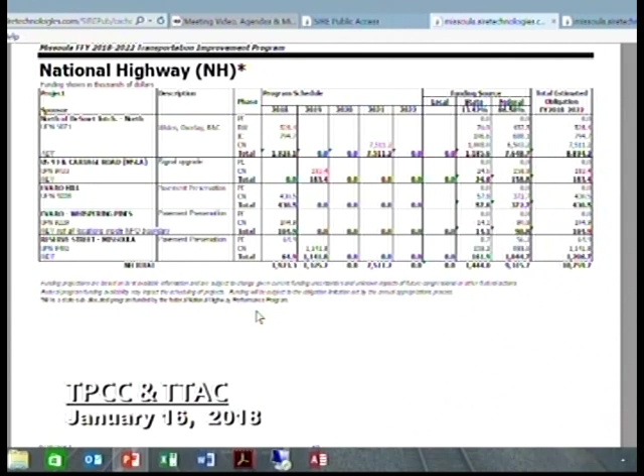So this next one here is the new funding source. If I can find it. Did I skip that there? Did it come up on there?

Here we go. Yep, so the project from Interstate Maintenance, the Van Buren Street Interchange, was just moved to this new funding category. All of our dollars are the same there.

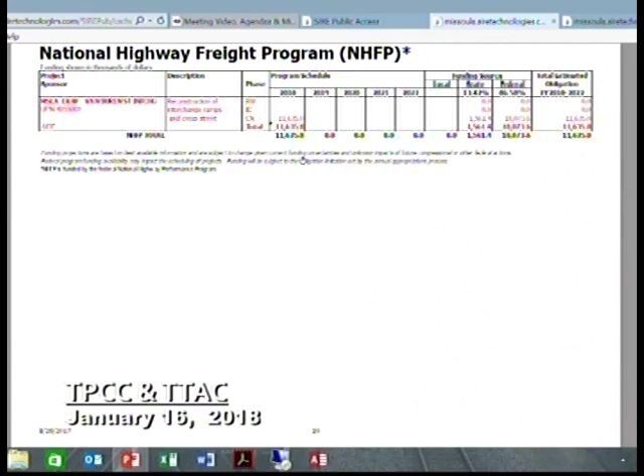I don't know if there's any questions right off the bat with that. I'll just add that the National Highway Freight Program category is a new category that was created under the FAST Act. It's not new money, it's just a new category that essentially says states have to have this category and have to program projects in it. So again, it's not new dollars, but the state has to show that projects are being completed that help the National Highway Freight Program. So hence moving the Van Buren Interchange project into this new category, it doesn't change any of the dollar amounts, just puts it in a new funding category.

For HSIP funding, Highway Safety Improvement Program, the skid treatment project, money was moved in 2018 to 2019. Missoula Signal Safety Project, the costs were increased by approximately $30,000 in 2018. And the Lolo East Missoula Safety Improvement Project, money was moved from 2018 to 2019, no changes there in dollar amounts.

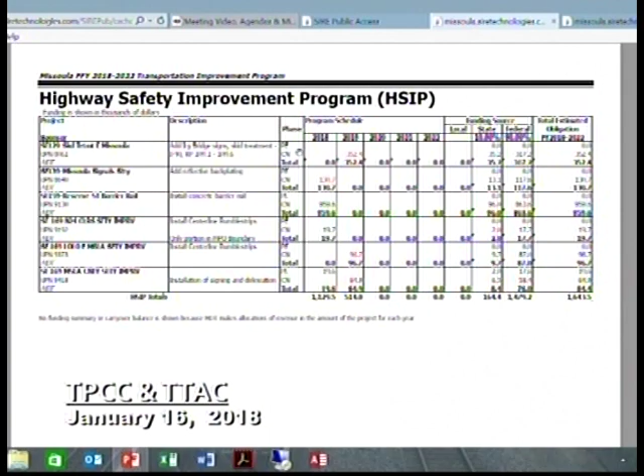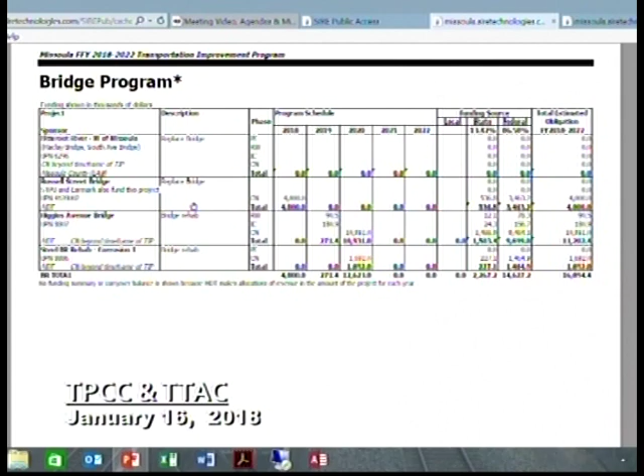Bridge program, Steel Bridge Rehab, they added $1.6 million in construction funds for 2020. And then finally, FTA section 5307, there was a $50,000 FTA transfer from the state in 2018.

And so with that, that's kind of a quick overview. As you probably noticed, most of the funds were just state-managed federal funds or state funds that were adjusted. But our recommendation would be to approve amendment number 2 to the TIP. And with that, do we have any further questions? Any questions or discussion, or I'd entertain a motion as well.

Commissioner? Yeah, and I'm probably sitting next to the person who can answer it, but where's this, what is the steel bridge? Where is that? Where is it physically? Do you want to go ahead and answer that?

I think it's multiple bridges. Yeah, it's one of those projects that spans probably the district, that addresses the steel bridges and deficiencies in some of the steel bridges we have across the district. So I don't know specifically what bridge to point to or which number of bridges that are actually in the MPO. Thank you.

Any further questions or discussion or a motion on the item? I would move that we approve the TIP amendment. Okay, the motion is in order. Is there a second? Okay, it's been moved and seconded. Is there any public comment on the Transportation Improvement Program amendment? Any additional committee comment? Okay, on the motion, all those in favor, please say aye. Aye. And opposed, no? All right, the motion passes.

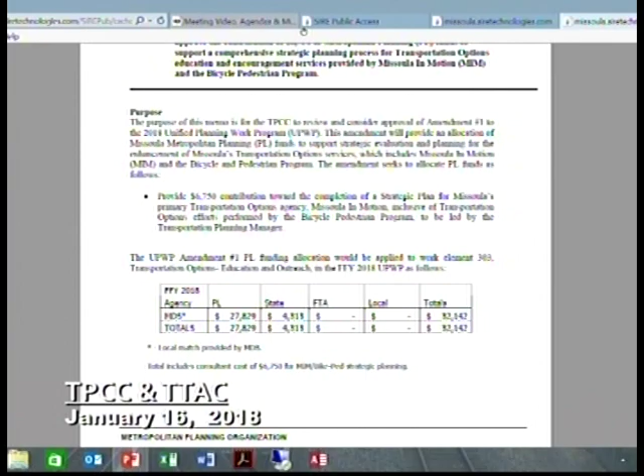The MPO has to go through every 5 or so years what MDT calls a certification process, where they check that we're complying with federal laws. There are no similar requirements for CMAQ funded programs, but I feel it's a good practice to do every once in a while.

Missoula in Motion did a strategic plan in 2006 with a consultant called Urban Planning Partners, and more recently Nelson Nygaard did a study that looked at all the TDM programs in Missoula, examining what Missoula in Motion was doing, the Bike Ped program, Mountain Line, and the TMA.

They looked at all the different services being provided by those various entities and made recommendations for each. A lot of the things recommended in both strategic planning processes have been implemented in one form or another. Some included structural reorganization, some included recommendations for new programs or changes to existing ones. Collectively we've done our best to chip away at a lot of those things.

Over the last couple of years, Missoula in Motion has had a few staff turnover occurrences, and we're looking for some direction on what our next steps should be in our program and how we can improve our services, programs, and efficiencies.

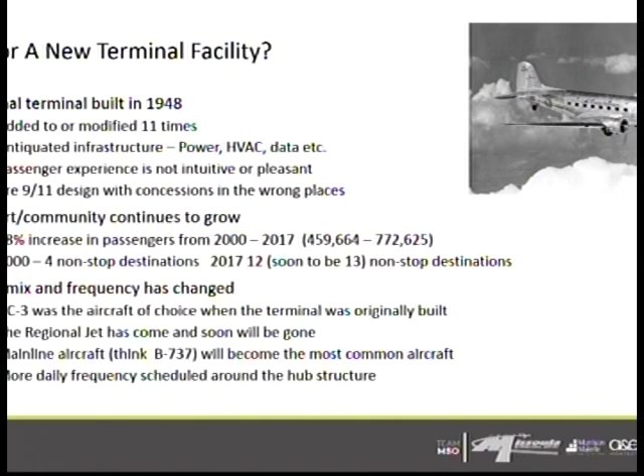So when we went out, we were tasked with some guiding principles. We want to design it for the users. We want you to come in. Right now you walk in the building and you can't even see where the ticket counters are if you come in the middle front entrance. You have no idea where Delta or Alaska is when walking in the doors.

You'll see later on, we want to make sure that it's expandable. We're not going to overbuild to start, but we want to make sure we can add on in little chunks as we grow. And we just want to be a good front door for Missoula.

Kind of take you through why we're doing what we're doing. So we are kind of landlocked. We have a lot of acreage out at the airport, but we have Highway 10 to our north. We have Minuteman Aviation on both sides of us, so we don't want to impinge on their ability to do a great business. And then we have a very good sized aircraft apron, but we don't want to spend money to recreate that. So we're kind of stuck there in that blue line off to the right of the screen - that's the building restriction line, height restriction line.

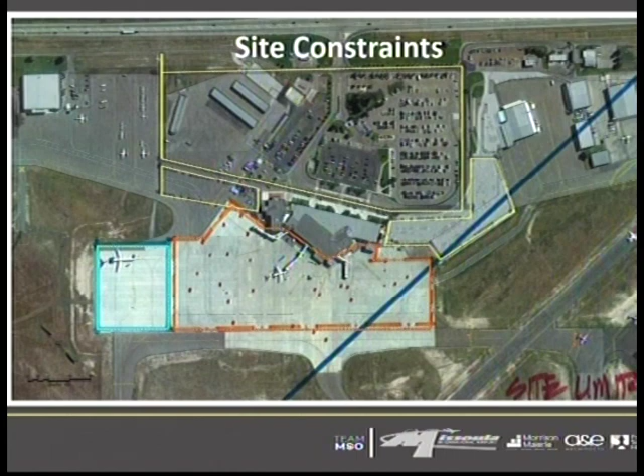So we have that on one side of us, and then we have the aircraft ramp to the south side of us. We're kind of penned in on where we're at, so we need to make decisions for the best use of our land.

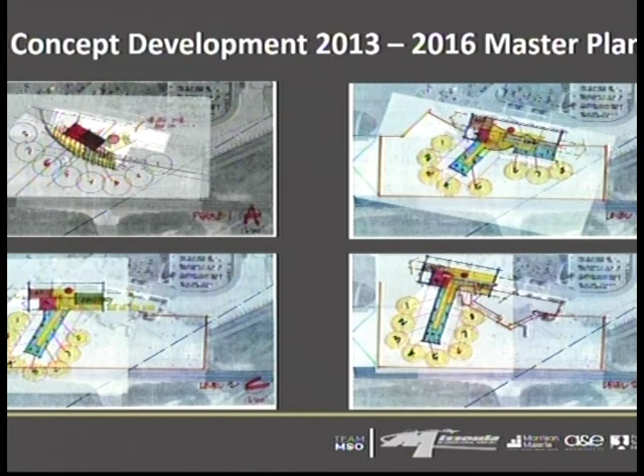So ultimately, based on the usable land without having to redo our ramp area and our de-ice ramp, we came up with kind of a 2-wing design - a double loaded pier to the south and a single loaded pier to the east, where we could just add on as needed. In our lifetimes, we're not going to get to 20 gates, but we have the ability to get there.

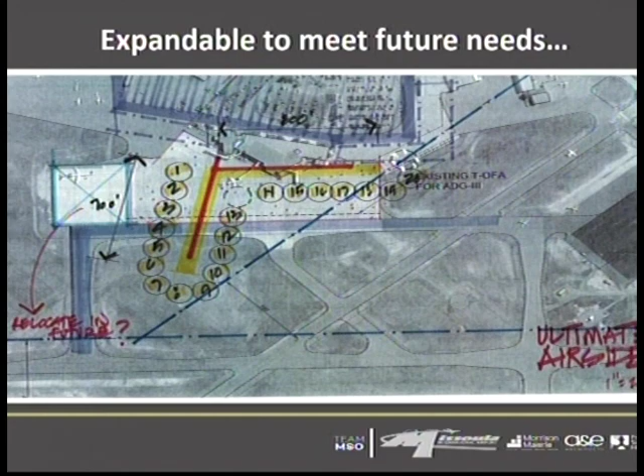So that's where we came up with our preferred alternative, laying it over our current terminal so that we don't impinge on Minuteman, and we need our parking lots to the north there. So that gets us to what we need today, about 8 gates, which is where we're going forward with.

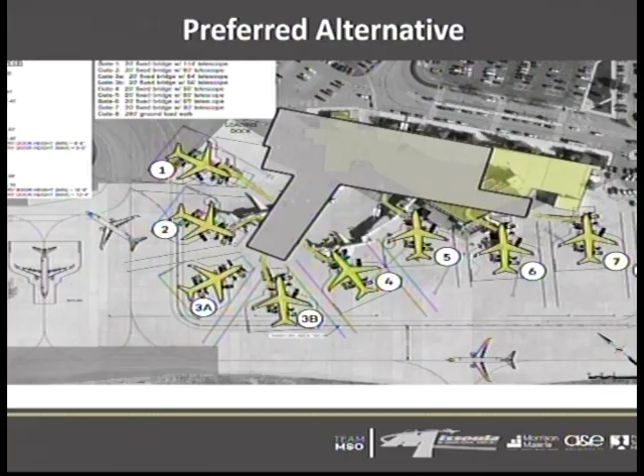So then we went into design, and I'm speeding through this because I want to make sure we have time for questions and answers later. We kind of started with a clean slate of, okay, what do we want?

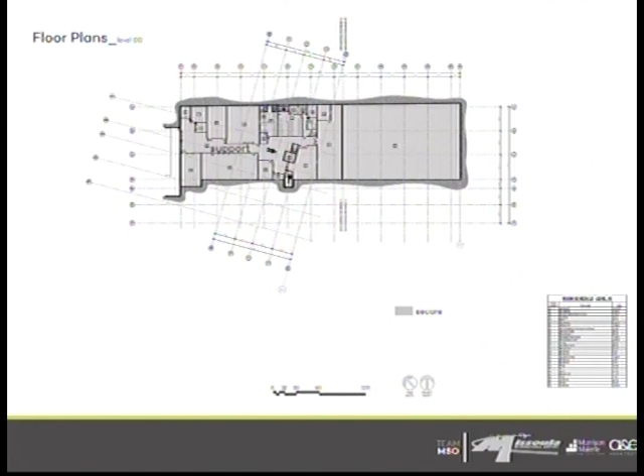The goal of this was we wanted to get our delivery trucks off the curb. So this has a loading dock off to the west end of the building so we're not taking up valuable frontage with deliveries, food deliveries in the terminal, because there are certain times of day where Liquid Planet comes in, and that's valuable frontage curb for our drop-off and pick-up passengers. So this was to get our deliveries sent to the basement where they could get screened, then elevators straight up after everything's been screened to where we need them.

Our first floor, what you would see from the street level, you've seen this in the blueprints there. Ticketing as you drive up on the left side of the building, and baggage claim to the right side of the building as if you were standing in the building.

Right now, when you check your bag at the ticket counter, you have to check your bag, grab it, carry it over, and plop it down on the screening machine. So this would get the bag handling part of it. You would just come to the counter, the ticket agent would tag your bags, put it on the belt, and you wouldn't see that again. So that is to get that out of the public's view. The rest of it is support in the back for ground equipment and airline ticket offices.

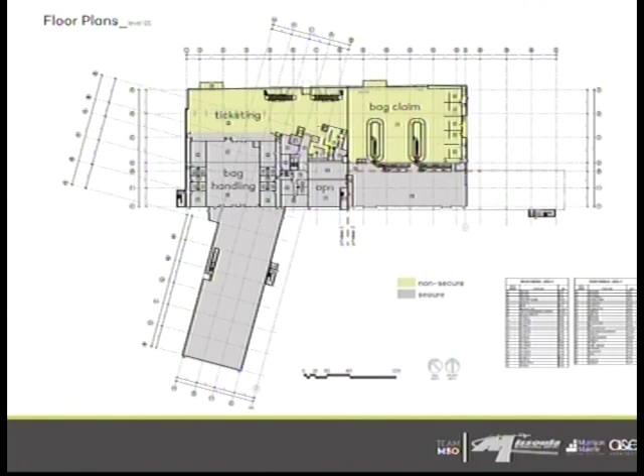Screening would be upstairs versus downstairs today. So you'd take escalators, check in at the counter, and those escalators are at the top that deliver you upstairs, one up from the ticket counter, and then for arriving passengers down to the baggage claim area. Right now we have 2 screening lines. We've been fighting for 3, but this is designed for 4, with the ability to add a 5th down the road, to get through concessions or get through screening.

Concessions would be right there, so past security, restaurant and bar. Nowadays, if I'm a passenger, my goal is to get through screening and relax and make sure I'm at my gate. So this gives our customers a little more selection than we have today.

Our outdoor deck has been pretty popular, so we've incorporated that into the design, where you can order directly from the restaurant bar and take it out onto the deck. The hold rooms are designed for the 737-800s, the biggest aircraft we currently have today, and could handle Airbus 321s, which carry around 221 passengers.

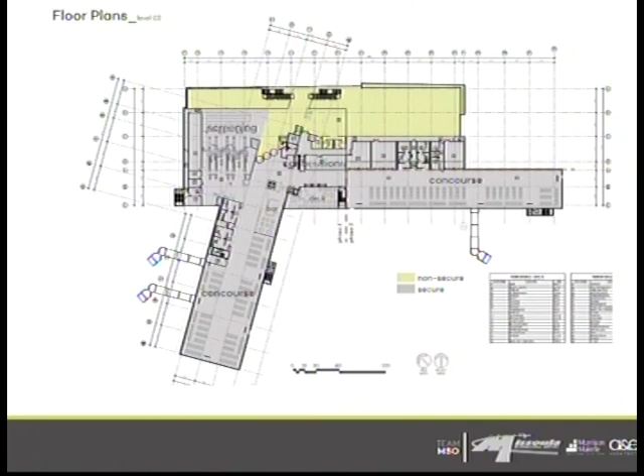One thing we've missed from the good old days is that when you're a passenger or a customer or a person picking up your loved one, there's no place to see airplanes land. So this gives an observation deck where you can actually look out over the airfield. That would be on the 3rd level, along with some administrative support offices up there as well. Our goal is to give customers more of a viewing area, so you can actually see people arrive and depart.

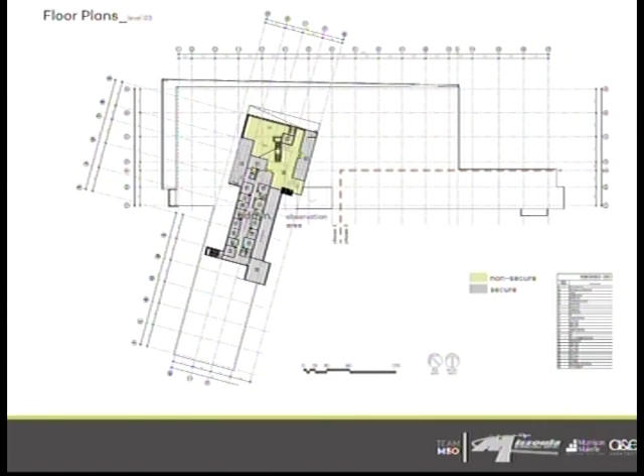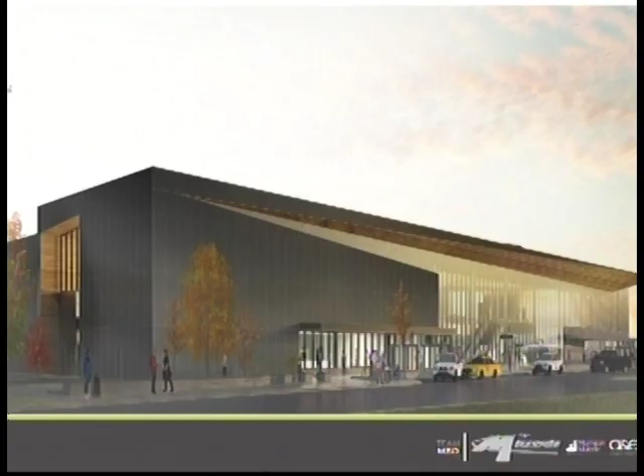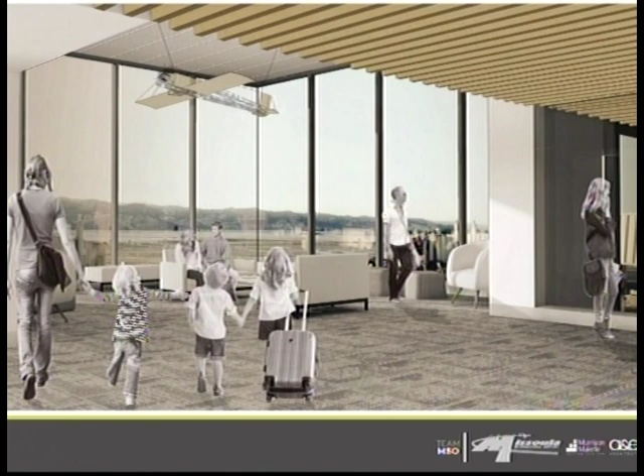You can see it's a lot more natural light that we're going for right now, and it'll be looking great from the interstate at night with the lights on. Just more architectural renderings — glass, restaurant. This was the observation area on the 2nd floor, so you can actually look out onto the airfield.

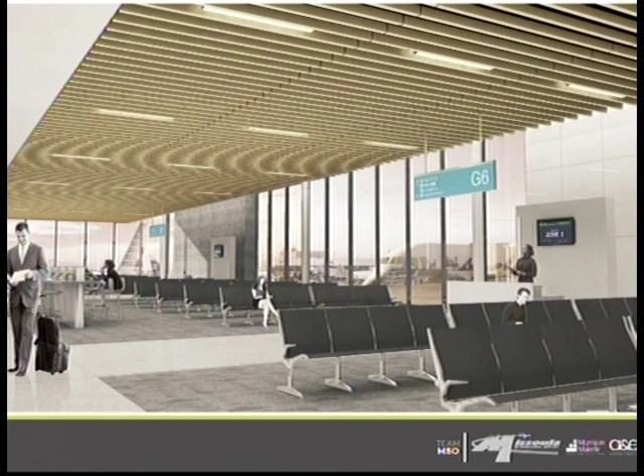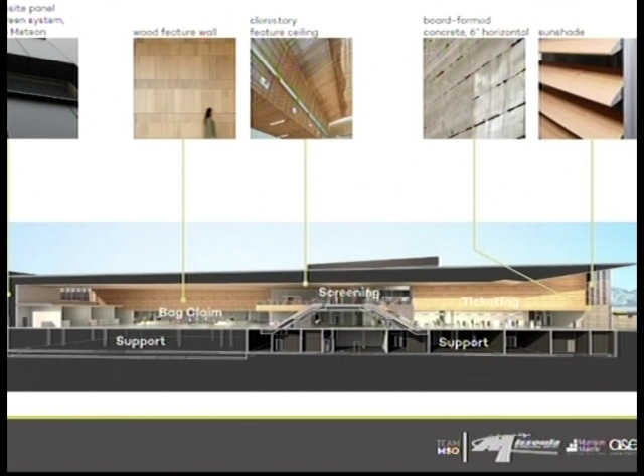More hold room space. Again, we're not at the point where we're picking out furnishings yet, just kind of what committees have looked at. The sunshade there is because we're worried about operational things, like agents working the ticket counters at 6 in the morning not wanting glare while working on the computer, so we're trying to incorporate sunshades to keep cool and keep the line of sight from the sun. But again, lots of windows.

So this is kind of where I wanted to spend a little more time, so everybody knows what to expect. We are building on our current site, and we have to stay operational as we're doing this.

Right now we've taken to our board a plan to start to design a new screening area. So right now, as you enter the airport, the building off to your right, or west, is our current screening area. You go through screening, then you have to climb a set of stairs to get to your boarding gate. And if you're going to Alaska, you go up the stairs and back down the stairs.

Our plan is to relocate the screening area. Since we only have 2 lanes right now, we'd like to design it for 3, and put it in the middle of the building, right where our big bear is, in the middle of the terminal, and turn that into our screening area. Then we would demolish the current screening area, and that's the basis where we'd start rebuilding.

Our thought is that moving the screening to the middle of the building, we actually think our customer experience will be better. Now we can turn our restaurant into a post-security restaurant. If you're on Alaska Airlines, you'll go through screening and won't have to climb a set of stairs, and you'll have a restaurant right there. So a little more customer amenities.

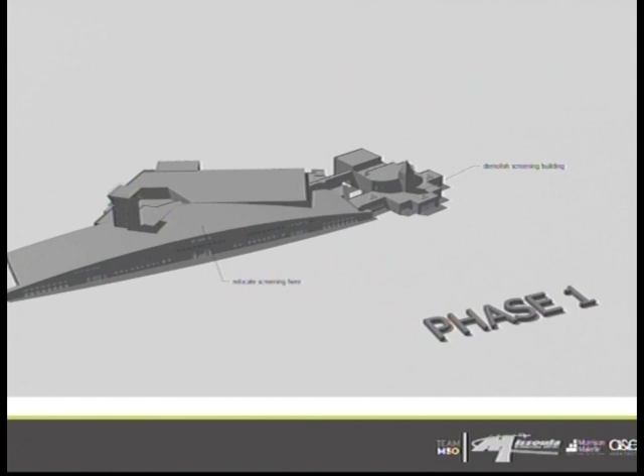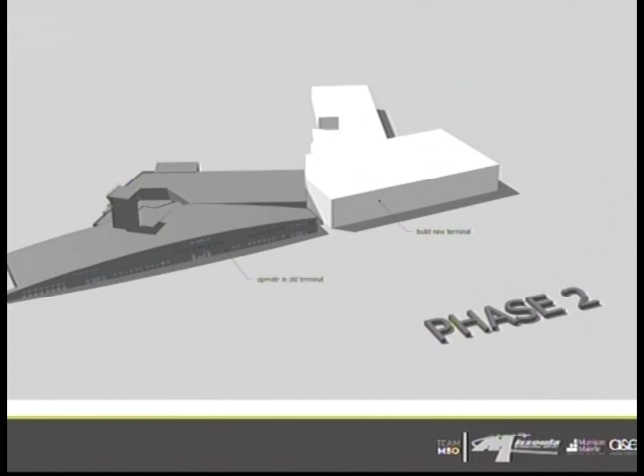That's the second phase, where I'm labeling that white block as new ticket counters, 4 new gates, screening, and some airline behind-the-scenes ticket counters, along with the baggage sorting area. Once that's open, we flip a switch, move into it, then demolish the middle of the building, create a walkway, and keep our current baggage claim area intact.

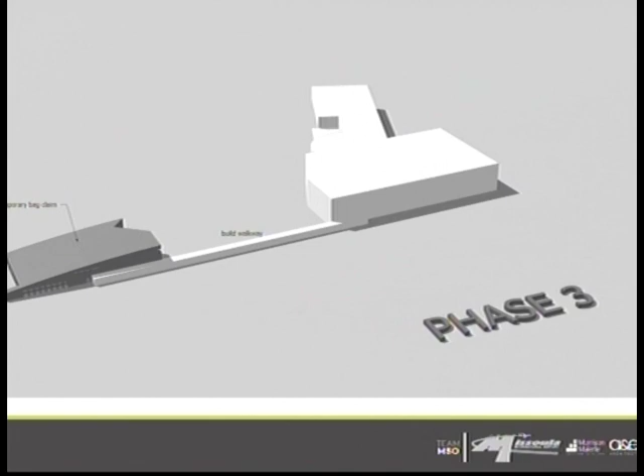So when people arrive on those 4 gates, they'd go down the escalator, which was in that earlier pictorial, and down the walkway to the current baggage claim area. Then we'd build the new baggage claim, 4 more gates, and demolish the current baggage claim area. So phase 1, or whatever you want to call it, is 8 gates.

Currently we have 3 jet bridges plus 2 ground boarding gates. So this would potentially be 8 full hold rooms.

And then it's just easy to expand. We can do ticketing in one wing, baggage claim in another wing, or expand more gates on one of the piers. There are 2 piers we can add gates to, to ultimately get to our full build out. This will take a number of years.

Right now for design, we've gone to design for relocating the TSA checkpoint, so that's currently under design. That will probably start being removed around September through the end of the year, so 3rd or 4th quarter of next year. Then at the beginning of '19, we'd start full design of this terminal, and break ground in 2020, somewhere in that range, if I have my dates right.

The good thing here is I'm not asking you for any money today. We are self-supported; no local tax revenues are used for this project. To pay for it, it's FAA grants.

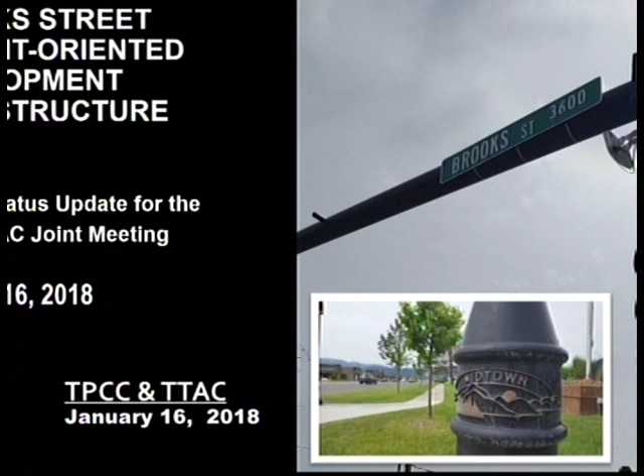I just wanted to provide a project status update and walk through the various elements of the study, provide some graphics and a timeline, and leave some time for folks to ask questions to get a sense of where the project is at. I know there's multiple agencies funding this study, and most of you are familiar with the background and the study area.

I want to touch on some past Midtown planning initiatives. In 2003, the Midtown Missoula report was published. Years later, the URD 3 needs assessment report came out in 2011. The Brooks Street Corridor Plan, a more design-level report, was done in 2014. In the interim, the Midtown Mojo Group was formed, and just a couple years ago, the Brooks Street Corridor Study was published, funded by the New Mobility West Community Builders Grant Initiative. That study laid the background for the next phase, doing more infrastructure-related specific design recommendations.

Touching on a few of the design recommendations published in the 2016 corridor study: improving pedestrian crossings was a priority, vacating short streets along Brooks Street, completing missing bicycle linkages, transit improvements, breaking up mega blocks, improvements at the Mid-Brook Street area, and a recommended lane reduction between Stevens and Mount Avenue. A lot of these concepts have been incorporated into our work thus far.

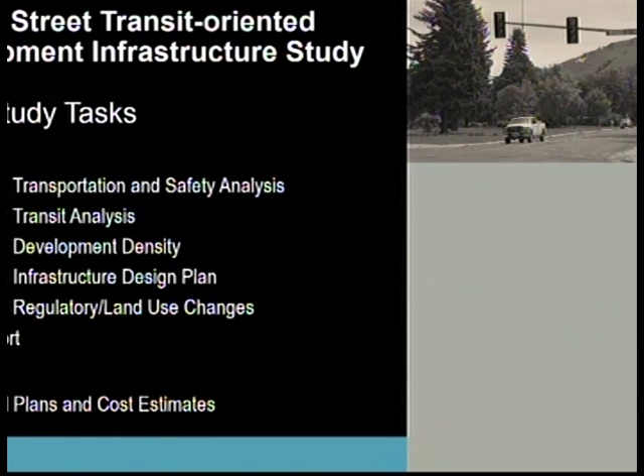And then there's a phase 2 that takes the concepts and moves them more into plan form, roughly 15 to 30% design. We're then able to develop quantities and costs and provide that information. There's a lot of ongoing planning projects in the city, and this project needs to coordinate with those.

In particular, we've had past coordination meetings with the City of Missoula Design Excellence Project that's currently underway. Also underway is the Missoula Urban Transportation District Long Range Strategic Plan. There's obviously a lot of work going on at Southgate Mall with the renovations there, and this project is trying to coordinate efforts and ensure there's consistency.

Also with recent planning projects, more regional planning projects, again the Brooks Street Corridor Study, the Long Range Transportation Plan recently published, the MPO Bike Facilities Master Plan has a lot of recommendations that interface with the Brooks Corridor and directly affect what's going on with this project. And the mall long range plan has some long-term implications on how the corridor will develop.

I'm just going to step through again these various tasks, and feel free to chime in and ask me questions as we go, or I'll leave time at the end for that.

The transportation analysis is the technical backbone of the study, looking at existing and forecast traffic conditions. Using a Synchro traffic model for the corridor, we've updated that model with 2017 turning movements. We collected AM and PM peak movements using Miovision cameras last year, 2017, and we've developed forecasts for two horizon years, 2025 and 2045, looking at existing and projected conditions in the corridor.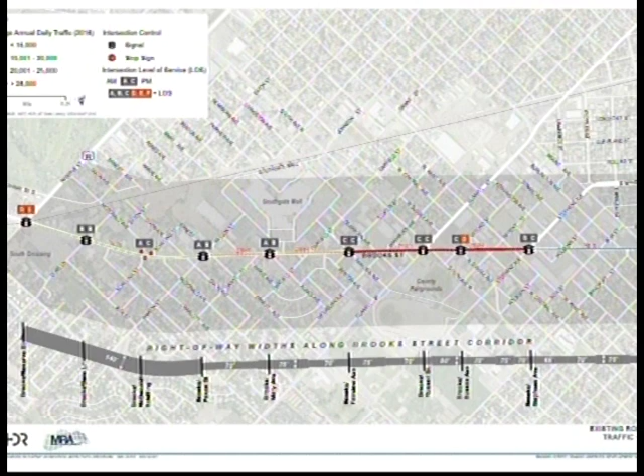Looking at 2045 future no-build, this is just if nothing else were done, given the growth rates we established for the corridor, what would it look like? You see volumes increasing, with some PM intersections approaching failure. Brooks and Reserve, I think the PM probably goes from E to F.

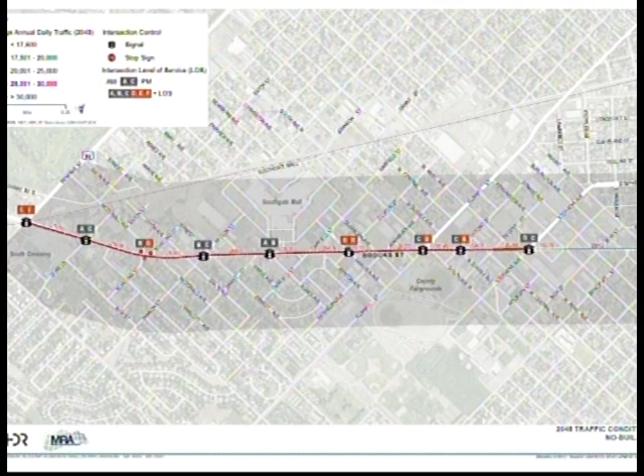Just to demonstrate future no-build. And so this graphic is looking at a 2045 condition, having modeled both a new signal at the Schilling McDonald intersection, as well as the lane reduction, and how it affects the adjacent intersections.

And so, just a graphical depiction again of how the ADT are, and in general the addition of a signal actually proves out in the synchro model to improve some of the PM conditions in the corridor, but there is no change in levels of service AM or PM at the signalized intersections in that three-lane scenario.

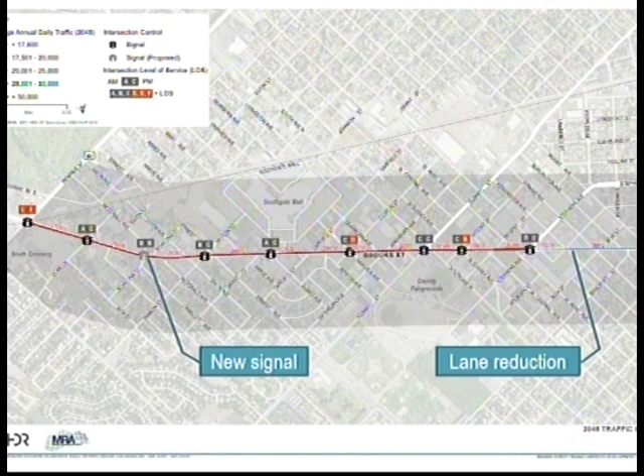At Stevens and Mount, and so again, I'm just kind of passing through these to show some of the results, and these are all included in technical memoranda that will be appended to a final report. Additional...

Analysis and a graphical representation of looking at queue lengths. We've examined both AM and PM queue lengths. It's highly directional in the corridor, and these are valuable to examine in terms of identifying potential transit priority opportunities, but also in siting and analyzing pedestrian crossings and seeing where these queues occur.

These are just values taken straight from Synchro, but again, nonetheless, just providing a corridor-wide graphical representation of peak PM travel in 2025.

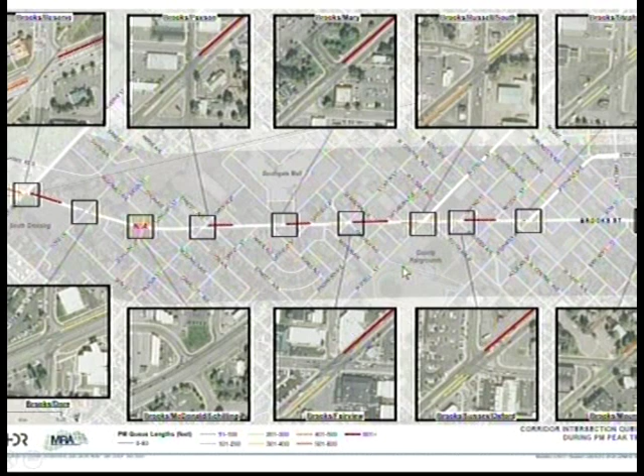Looking at the crash analysis, we get a 10-year data drop of crash history, mapping out the crash types by intersection and total counts. This corridor did have a couple fatalities in the Dore area, at the Dore intersection that was rebuilt in roughly 2016, so those data points were removed from this crash analysis. Again, just a graphical depiction of corridor-wide intersection crashes and the crash types.

You can see high numbers of crashes at the busiest intersections, at Reserve, at Russell Street, and South.

Task 300, the transit analysis. This is looking at existing conditions.

Let's stop for questions right now, and move on. Does anyone have any questions at this point?

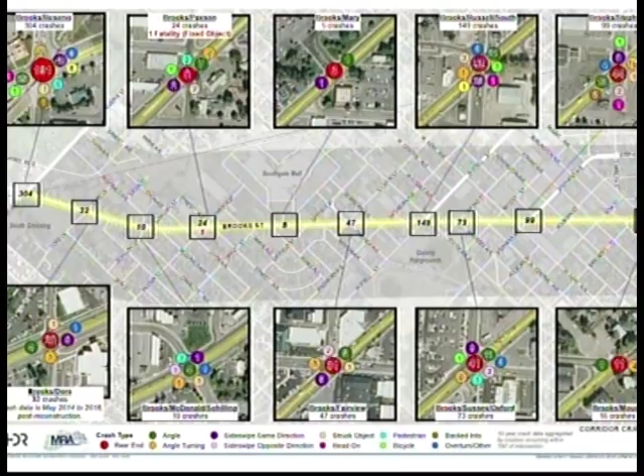Commissioner Curtis: So what is the goal of the lane reduction between Mount and Stevens? I mean, why do we feel like we need to cut it down?

Well, I don't know the background of the public involvement and why it became a strong recommendation in the study. I mean, the benefits are you have lower volumes there, and so it provides an opportunity. You can still maintain a level of service that's currently being experienced with a reduction in lanes.

So you go from a four-way to basically two-way, but a center turn lane. That frees up roadway space which you can use to build bike facilities, enhance pedestrian facilities, or on-street parking. It's a concept implemented in a lot of urban areas to realize a complete street build out, with benefits in simplifying movements and reducing conflicts.

And is Brooks back towards Hellgate High School only two lanes? You forget when you aren't standing there. Right, at Mount it becomes two-way. Okay, right, thanks. Any other questions at this time?

Mr. Weiss? Just speaking to that, pedestrian safety enhances greatly when you can remove having to cross two lanes at once. Since pedestrian crossings were one of the desires in this, I think that's one of the motivations for examining that. Federal Highways Administration has said that any four-lane road in an urban area with fewer than 20,000 cars should be evaluated for a three-lane because of the safety benefits. Thanks for including that in this analysis.

So transit analysis, this is somewhat of a discrete task, but has implications on the overall concepts being developed. We looked at existing conditions, ridership data, both within the corridor and regionally with all the various routes. Route 7 in particular, looking at various alignment alternatives, bus stops, and most of you are probably aware that Mountain Line has the mid to long-term goal of routing Route 7 onto Brooks at 15-minute headways, introducing high-frequency, more reliable transit, which can be the impetus to spur TOD.

Looking at other transit priority analysis and concepts, we looked at transit signal priority at the signalized intersections, concepts such as queue jumps or BAT lanes - those are business access and transit lanes. The transit component includes an operational analysis looking at corridor travel times for various alternatives being evaluated, looking at the existing traffic signals and seeing if timing adjustments could improve transit efficiency and travel times.

The bus transfer center is a big piece of this analysis. Mountain Line and this project are hoping to identify feasible locations for a future bus transfer center. Currently it's at the mall, and it could stay at the mall. There's a possibility it could move somewhere else, so we're walking through an analysis, doing a multi-criteria evaluation of potential locations. Once we narrow those down and ideally come to a preferred alternative, we'll develop a conceptual diagram of the bus transfer center.

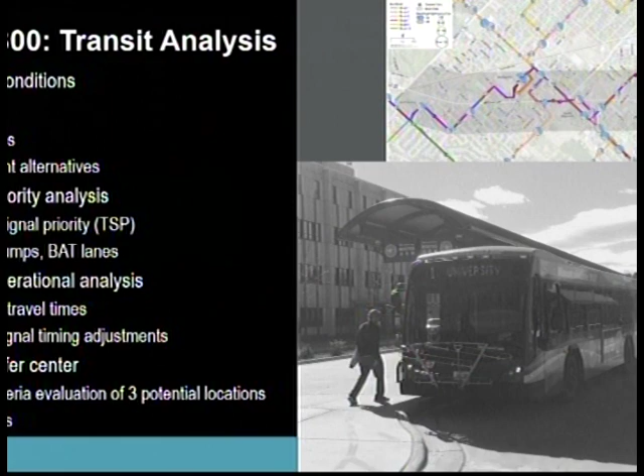The evaluation criteria, just to name a few: access, egress, available area, parking included, looking at the underlying land ownership, proximity to major trip generators, the operational costs and route impacts. All of those are going to be qualitatively evaluated to weigh various options.

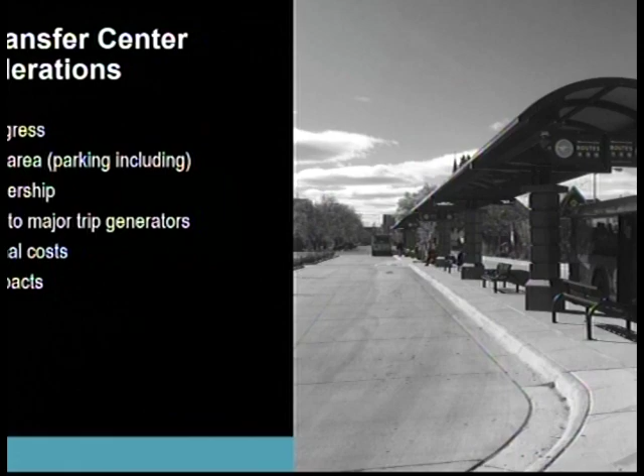I just wanted to look at one close-up concept here. This is the queue jump and BAT lane concept that we're evaluating. It's just an idea for this segment specifically, between Dore Lane and Reserve Street. This concept looks at improving bus travel times by introducing a queue jump, a dedicated lane where buses bypass queued traffic in the through movement.

This concept is entirely predicated on Route 7 remaining on Brooks through this Reserve intersection, going on to Walmart. What it essentially is, is a long right turn lane for vehicles accessing the businesses, thus the BAT lane, the business access and transit lane.

This is a concept used elsewhere to assist in getting beyond congested areas and maintaining reliable travel times for buses. Again, this is concept level and there's more detail to work out, but we're identifying what lane widths and configuration in the roadway would look like with this concept. This also shows buffered bike lanes in the corridor, starting from Reserve and heading northward into the study area.

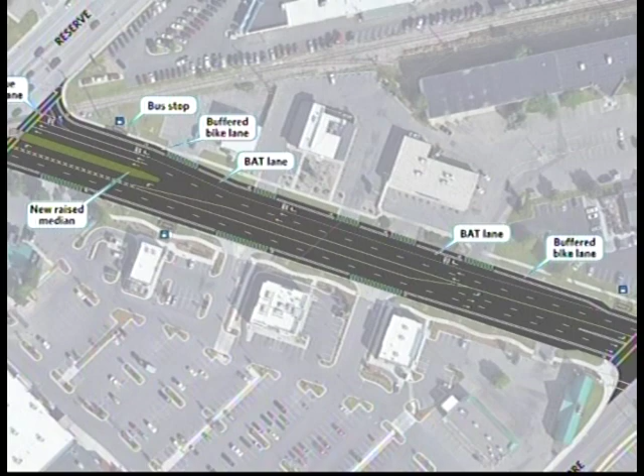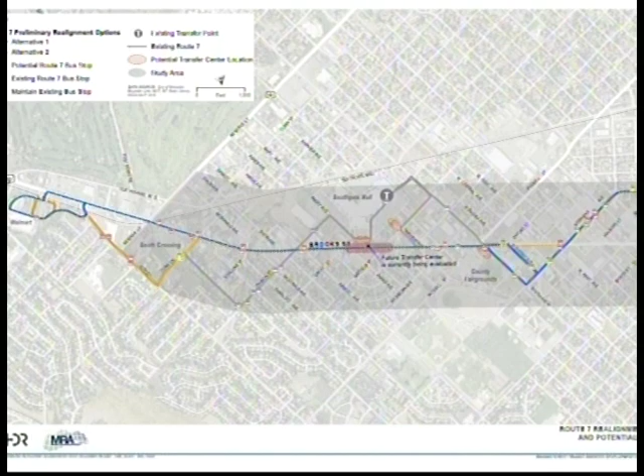Then I have one follow-up question. So when you were showing the potential transit spots, one of them looks like it's at the fairgrounds. Response: We solicited for input on that location as we were planning for the fairgrounds and didn't get any, so that is not planned in the fairgrounds. Follow-up: So if somebody's thinking they want to do that, we probably should know about it sooner than later, because we're going to be starting to hire people to plan infrastructure, and that's not in it.

Okay, I mean, Emily Bentley is on our committee, but I would welcome any comment on that. Ms. Buchanan, do you want to add? Okay, all right. Anything further on the transit piece? Okay, let's move on.

So Task 400 and 600 were led by Leland Consulting Group, based out of Portland—a land use consulting company. They specialize in TOD implementation and market analysis, and they were valuable in pulling together the various components of these tasks. I think several people here have seen some of the background information on this.

The development density task looked at existing densities and how that affects and could support increased ridership, using a graphic they produced looking at our corridor in general. Several nodes were identified in the planning study and used in their analysis to look at existing land uses. They also examined various reference nodes in the city—downtown, the Brooks and Higgins area, and the Slant Streets area—just to provide a comparison.

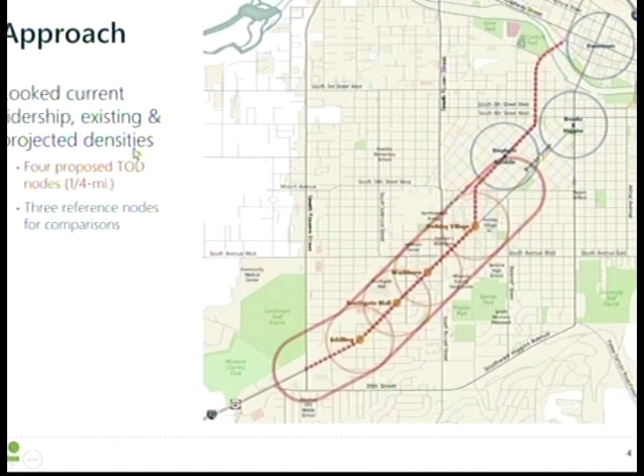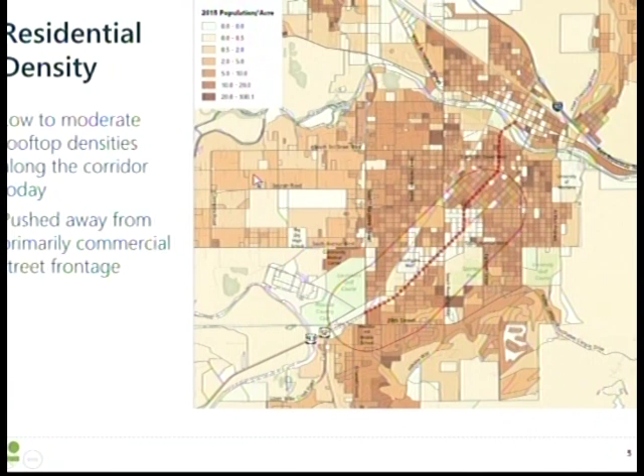Employment density similarly shows kind of an inverse pattern—there's a high level and densification of employment in the corridor, and you can see how jobs drop off as you move away. This all feeds into the concept of TOD, where a certain level of jobs and residents is ideal in supporting TOD infrastructure.

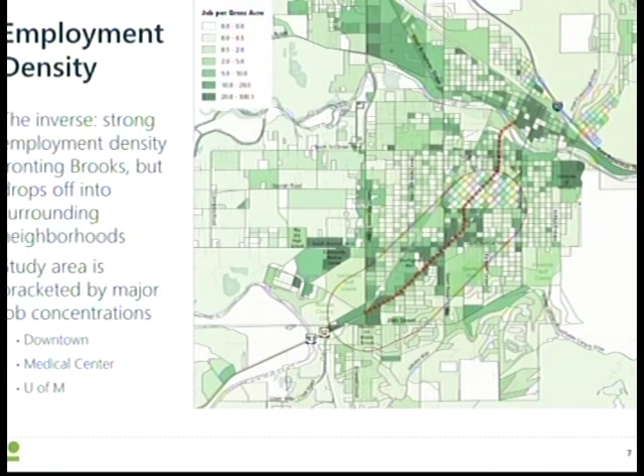This just shows the two mapped together, seeing employment densities, a lot of that downtown, the green rings are employment, kind of scaled employment densities, and then the residential densities are the underlying area here, the orange that doesn't turn out so well on the screen. When combined, the jobs and residences together make up what they call activity units, which in many TOD studies are used as a measurement to gauge ridership and look at those relationships. That's what they're attempting to do here.

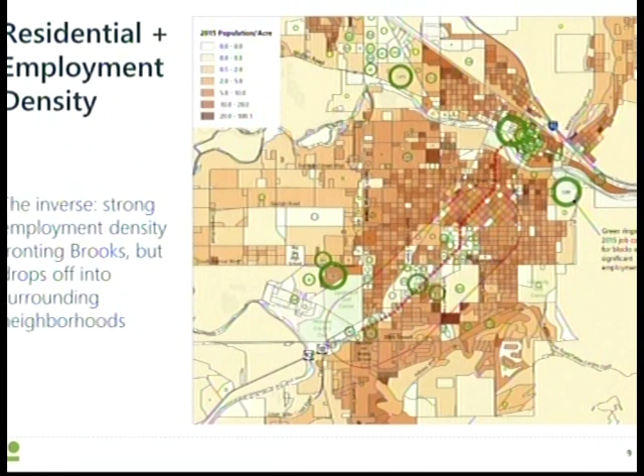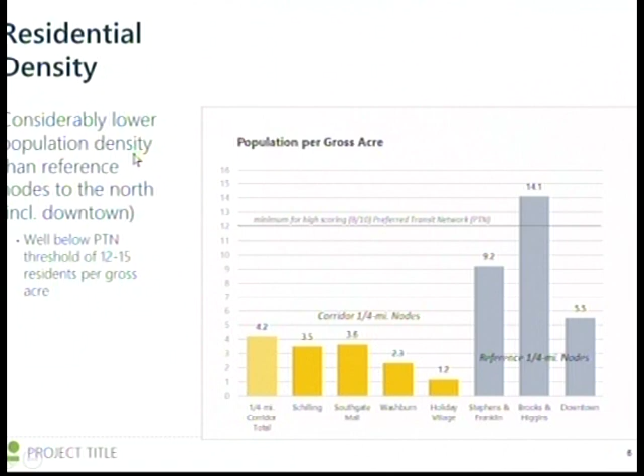Another way of looking at our corridor nodes here. This just maps out the population per gross acre, again with the whole Brooks corridor and our reference nodes. This is showing the densities, looking at this reference line, the minimum for high scoring on the preferred transit network. Densities of 12 to 15 residents per gross acre were identified by literature review and the former Mountain Line Long Range Plan as the ideal density to support transit and TOD more generally. So it's showing that the corridor doesn't quite hit the threshold for residential density.

Looking at this same kind of reference line for jobs per acre, it's a demonstration that the corridor scores quite well and does have a high density of jobs. That bodes well for future success in TOD when compared to the various reference nodes. You can see downtown is a very dense employment area.

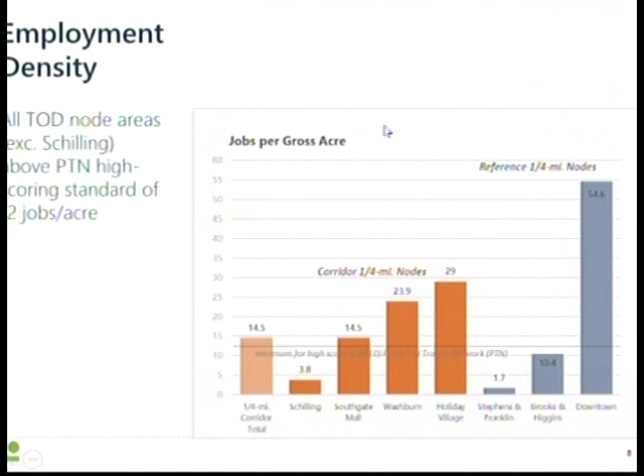This is just a scatter plot of the same information, basically showing that for TOD, in an ideal world, you'd be up in this quadrant with jobs and residences. Employment densities are the vertical axis, and residents are the horizontal axis. This shows that the reference nodes and proposed TOD nodes exceed the benchmarks in some areas, but neither score high in both residential and employment density. So it's a way to look at existing land uses and where focus should be to best meet TOD goals.

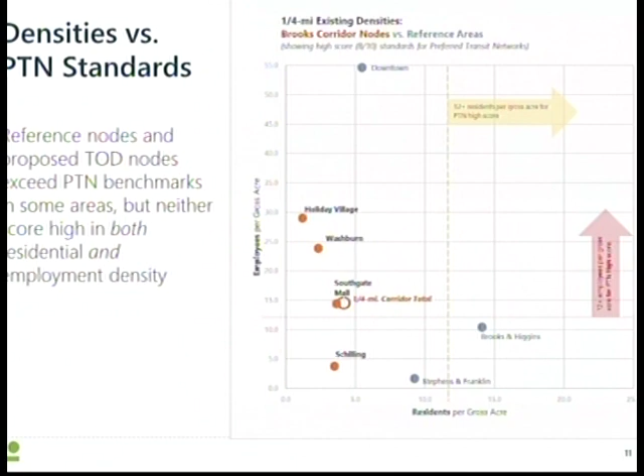Looking at some of the multifamily development momentum, again this is just a snapshot of the multitude of graphs and data they mapped out. This is showing multifamily development post-2013, where residential permits have been received for new units, demonstrating that generally all the multifamily development is occurring north of the project area, not necessarily in the project area.

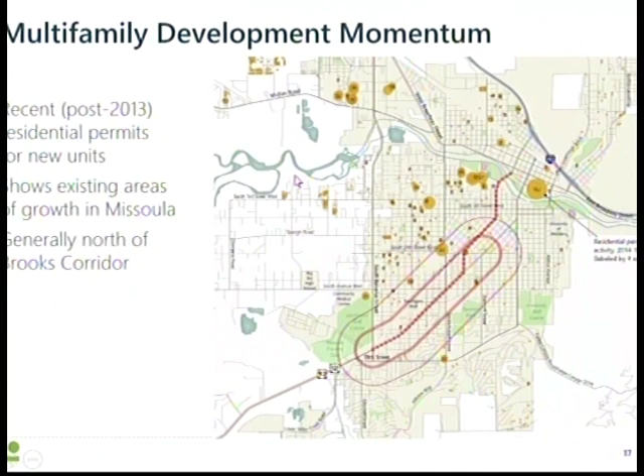They looked at various developments around town, the two top ones being within the study area, the Southgate Triangle Apartments and the Quinton Apartments, looking at them as model developments, denser developments. They have a whole slew of recommendations for the type of development and various elements that could support TOD in terms of building out the ground floor, having multi-use commercial retail mix and such.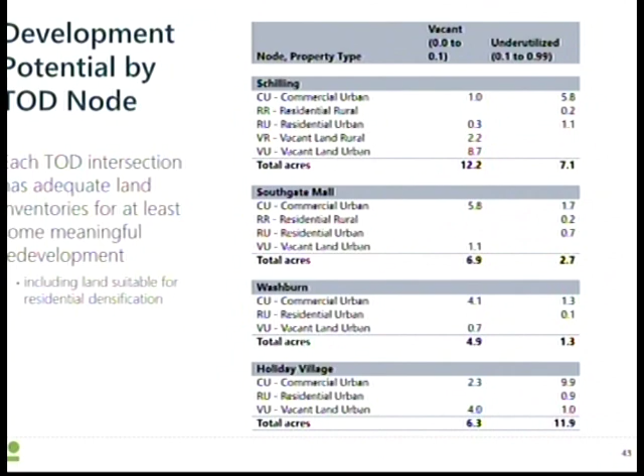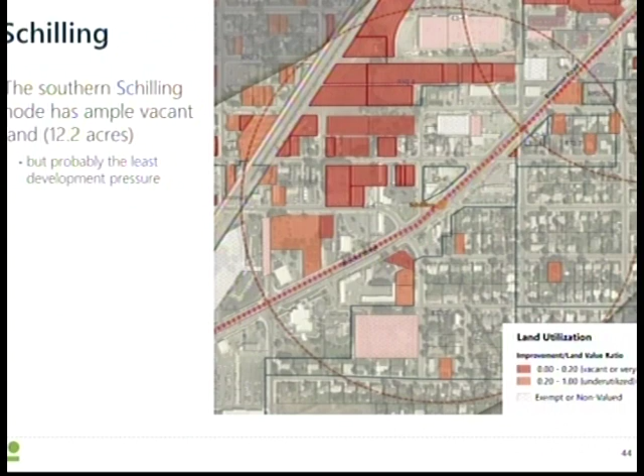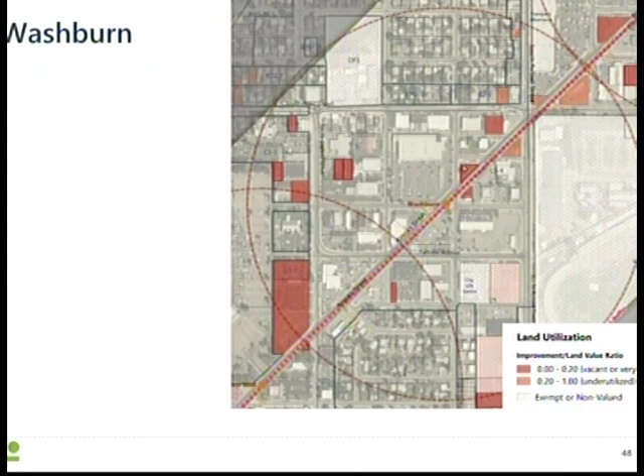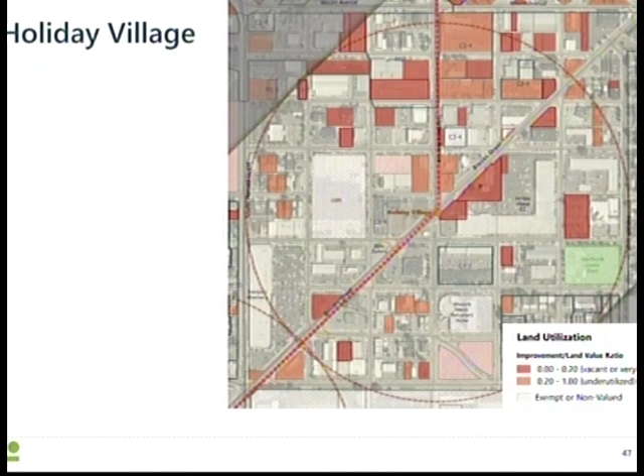Washburn area, Holiday Village - this feeds into their analysis and recommendations for looking at these nodes, prioritizing which should receive the most focus in the future, and the density and regulatory piece. They've also looked at existing zoning regulations for Missoula and how it relates to various elements of TOD, with a series of recommendations in that regard. I know I'm going through these quickly, but stop me if you have specific questions.

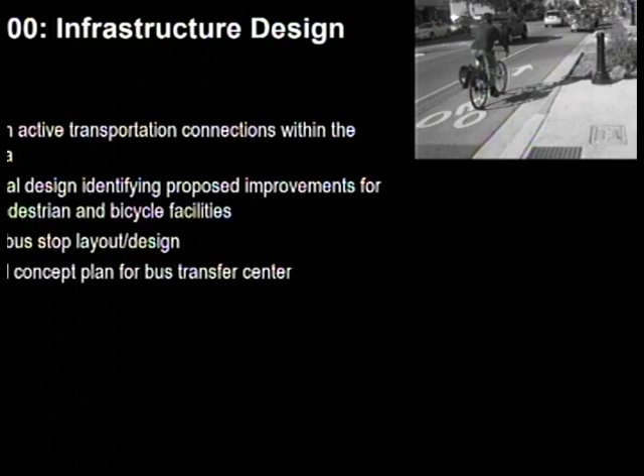The infrastructure design plan is more boots-on-the-ground, looking at roadway improvements and street-level details. This piece evaluates active transportation connections within the study area, conceptually identifying proposed improvements for transit, pedestrian, and bicycle facilities, evaluating bus stop layout and design, and a high-level concept plan for the bus transfer center.

So really just taking the previous results and recommendations and feeding them into an infrastructure improvement plan for pedestrians and bicyclists. This is a key piece where the Brooks corridor is sorely lacking. This slide shows the approach for improvements - corridor-wide interventions applied along the entire length, and segment-specific interventions looking at the various segments.

The project area lends itself to three distinct segments: the south segment, Reserve to Paxson; the central segment, Paxson to Stephens; and the north segment, Stephens to Mount. So we're looking at how to apply specific interventions through those various segments.

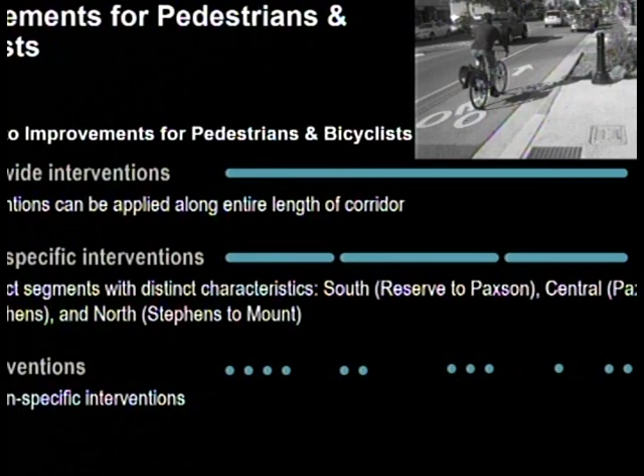Spot interventions look at site-specific locations. Corridor-wide interventions are concepts being evaluated, like simplifying existing geometries. This graphic shows how we've got a lot of existing skewed intersections, and squaring up the intersection to Brooks is one concept being evaluated through the corridor. Benefits include improved visibility, slowing speeds of turning vehicles, shortening crossing distance for pedestrians, and adding space for street furnishings, bus stops, etc.

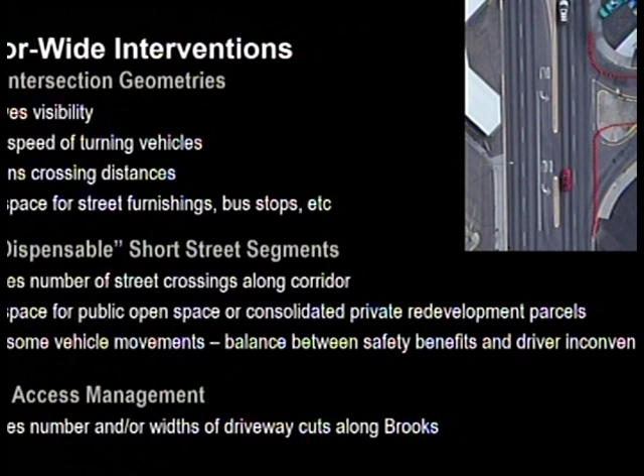Another concept is vacating dispensable short street segments. There are a lot of redundant and potentially unnecessary small street segments that could be removed or reduced to just private access. Reducing the number of streets could improve overall efficiency of the corridor, reducing turning conflicts, etc. And then driveway access management - this isn't an access management plan per se, but elements of it are being incorporated into this study to look at how Brooks can be modified to improve flows for motorized and non-motorized users.

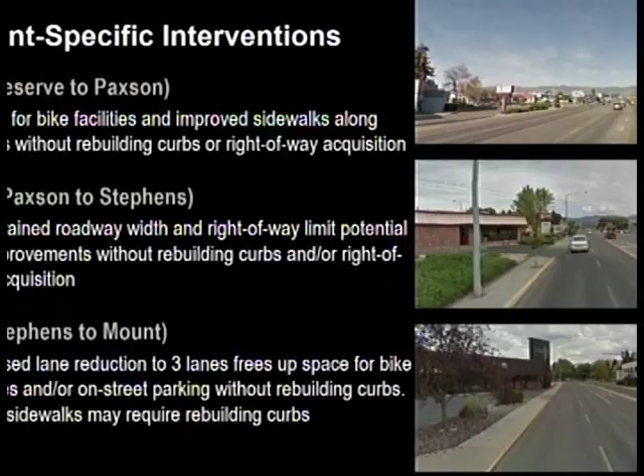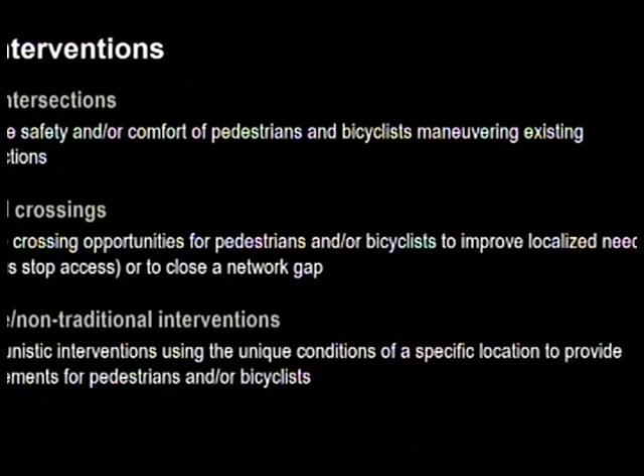Spot interventions look through the corridor at where we can make improvements at existing intersections, adding additional bike-ped crossings, and looking at innovative or non-traditional interventions that are opportunistic through the study area.

So again, John, how many slides do we have left? I'm sorry? We've got just a couple minutes left, so I just wanted to check where you were on time. I'm almost done here. Okay, great.

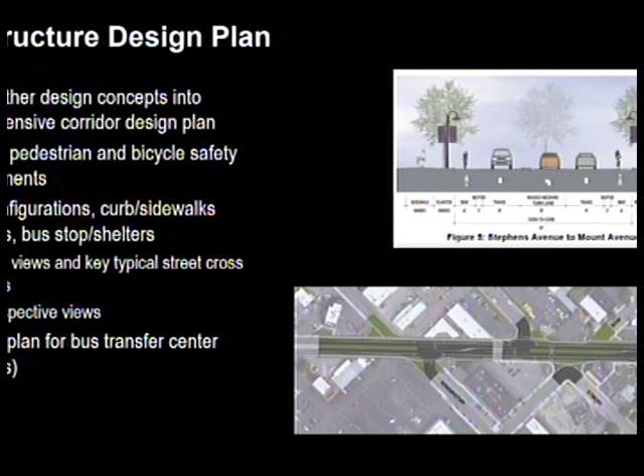This is just a quick summary of what the infrastructure plan is looking at. I wanted to look at a couple of concepts to give you a flavor of what we're examining - we don't have to spend much time on these since they're just concepts.

This is the intersection of Schilling and McDonald, where a new signal has been modeled. There's a proposal to add a two-way cycle track, primarily to facilitate the east-west movement of a proposed neighborhood greenway. This graphic shows the buffered bike lanes on the street and a street closure here - just to provide a quick snapshot of some concepts and graphics that are preliminary at this stage.

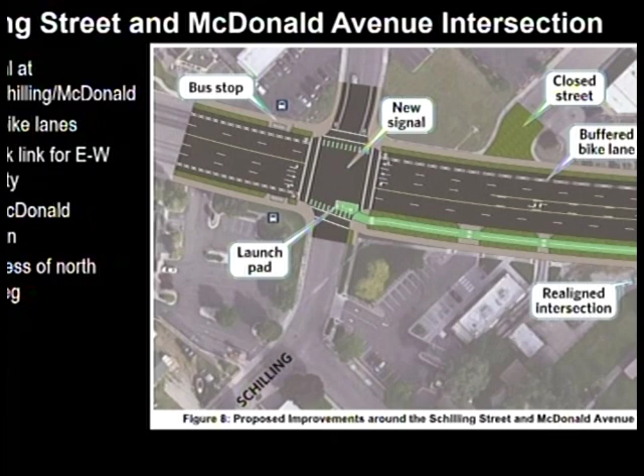Kent Avenue - here's another example at the Stephens Brooks intersection and the intersection of Kent Avenue. We're taking previous planning efforts and opportunities where Kent Avenue is another east-west neighborhood greenway bike facility, identified in previous efforts to improve the crossing for non-motorized users. This concept looks at adding a bike facility, a two-way track, to facilitate this east-west movement, considering existing adjacent properties and moving parking from one side to the other. This includes closure of a short street segment, a realigned intersection, and median extension.

This also shows the treatment of the three-lane section in the vicinity of Stephens, moving towards Mount Avenue.

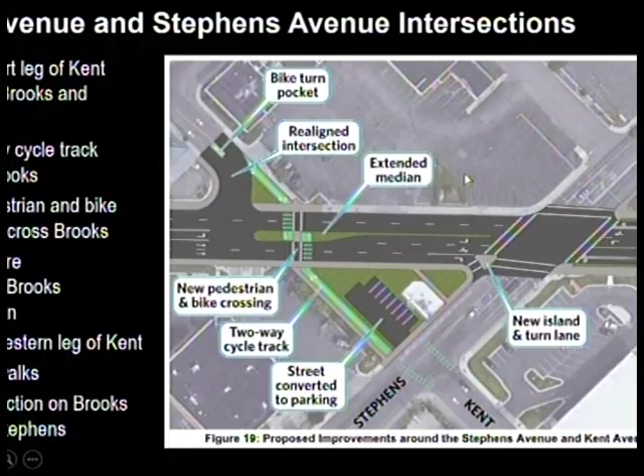I just wanted to touch on schedule. This study is roughly an 8-month study, and we're currently at the point where we've developed various drafts of technical memoranda for these tasks. We're working on preliminary concepts right now that are being vetted and revised. In the next month or so, a final report will include recommendations and append all the technical analyses. Roughly in March, there's going to be a movement to phase 2, where costs and technical drawings are developed. Then the real work begins on how to pay for or identify funding for these opportunities, and there would be a public meeting sometime after the conclusion of the study. That's all I had, I apologize for going so long, but this is all the information.